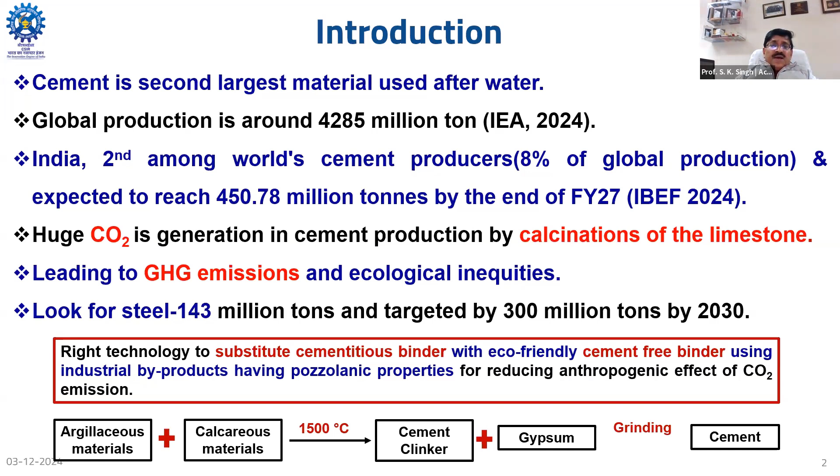Looking at the overall problems we are addressing: cement production consumes about 5 gigajoules of energy, a huge quantity of 1.5 tons of raw material per ton of cement production, and accounts for about 7% of global CO2 emissions. This varies by company. 1 kg of OPC releases about 0.75 to 0.85 kg of carbon dioxide. This is recent data, and day by day it is increasing.

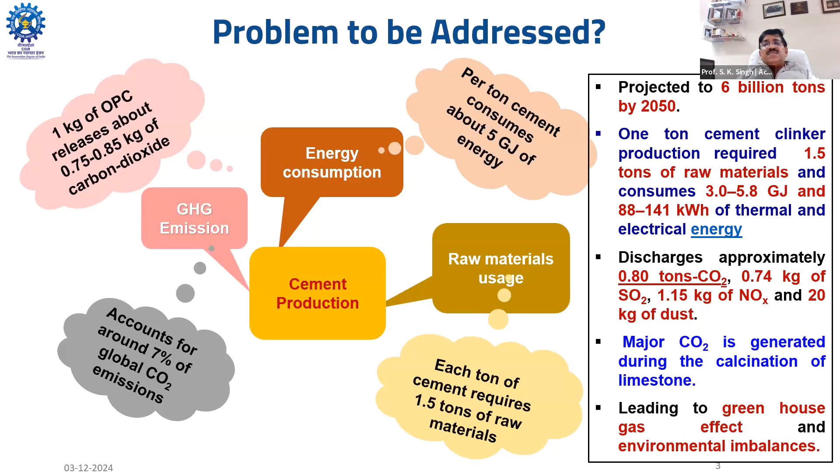Not only this, we are also discharging SOx and NOx in huge amounts. So we have to look into the next system.

So scientists and producers are working on how we can reduce the clinker factor. Industrial byproducts such as fly ash, ground granulated blast furnace slag, silica fume, calcined clay, or other materials are continuously being used, and every effort is being made to reduce the clinker factor to less than 50%.

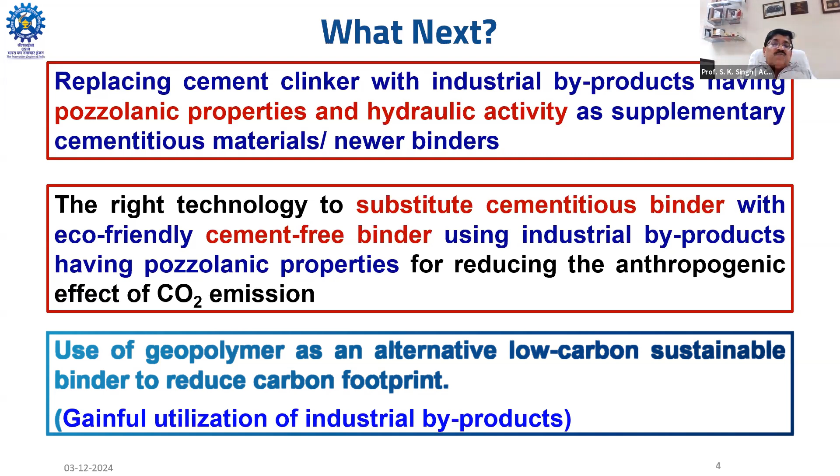We are also continuously working on other types of binders, known as alkali activated binders, which contain no cement, only utilizing some chemicals and industrial waste. This is known as geopolymer, a very low carbon sustainable binder that reduces carbon footprint. Not only is it sustainable, it also utilizes the huge quantities of industrial byproducts we have been producing. I have tried to list the different types of binders.

Different groups are working on this all over the country. It may be calcium aluminate cement, calcium sulfoaluminate cement, composite cement. We have a code also on composite cement, composite limestone cements, and alkali activated binders.

Recently my team has been working on this, and super sulfated cement, and also we are working on carbon negative cement and LC3. But if you look into it, every binder that's coming up has some issue or drawback or challenge. But if it's not allowed to be used in construction, then development cannot happen, no innovations can come up.

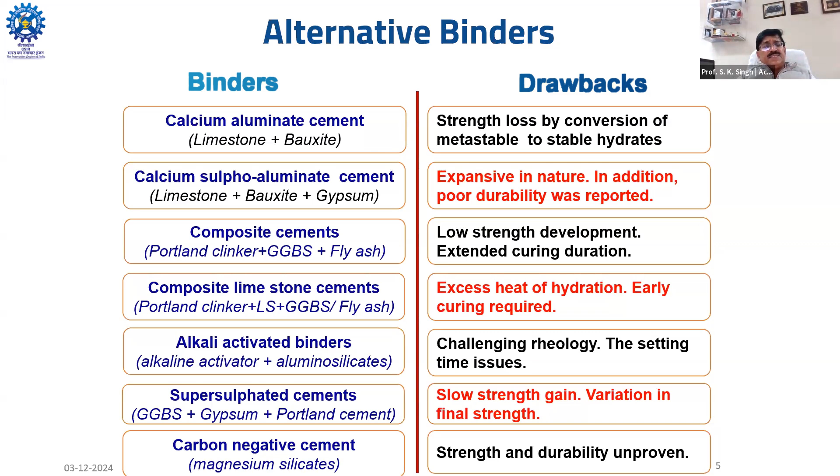So we have to definitely utilize those newer low carbon binders, looking into whether some minor effects are there which are not affecting our durability and strength properties much. If so, we will definitely go ahead.

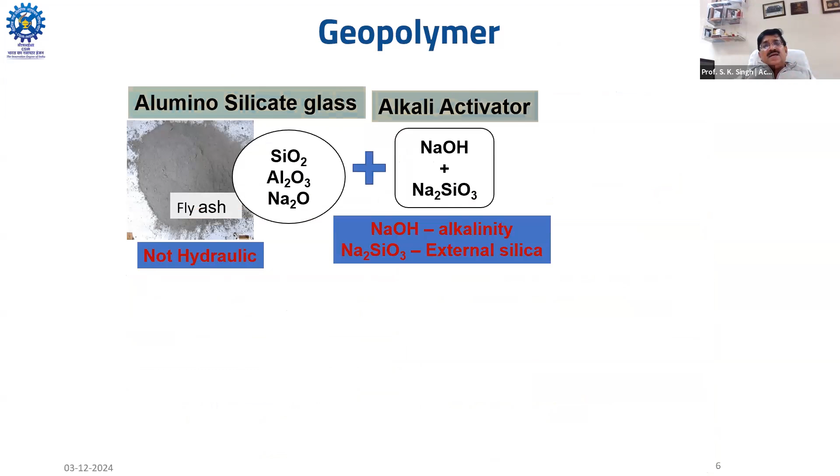For those who don't quickly understand geopolymeric reactions: let's take fly ash, which is rich in silica content, alumina and sodium oxide, which by nature is not hydraulic. We are adding alkali activators such as sodium hydroxide and sodium silicate, which enriches sodium as well as silica oxide through this activator.

So by applying some temperature, we are converting or producing NAS, that is sodium aluminum silicate. But because temperature is an issue, we want to develop these properties at ambient or normal temperature.

So we have to add some material which can quickly react with the aluminosilicate glass available in the precursor, like fly ash, GGBFS, or other things, which can generate exothermic reactions and generate heat, and later on we can convert into geopolymeric binders. By adding GGBFS into the fly ash and adding alkali activator, the available calcium oxide will quickly react with the available activators.

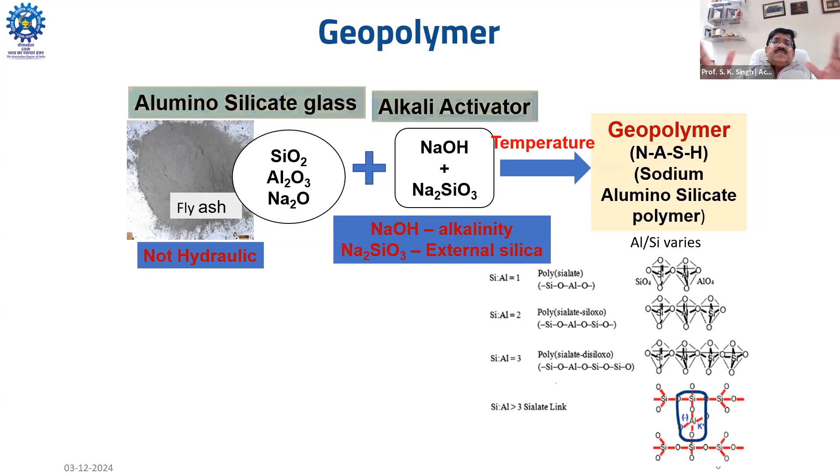And it will generate huge energy, and by this the internal temperature will increase, and the fly ash and other material will get activated and convert into NAS. So this is the basic chemistry about the geopolymer.

Then in Dadri, sponsored by NTPC, in other parts of the country. Not only that, we have made geopolymer self-compacting concrete and also building products like beams, slabs, and other things. We have also made a building with this geopolymer.

But one major issue is that there is sodium hydroxide involved. Handling of this corrosive material is a big challenge, and because of this we are not able to promote it in a bigger way in different parts of the world or country. We are making it, but scalability is a big issue.

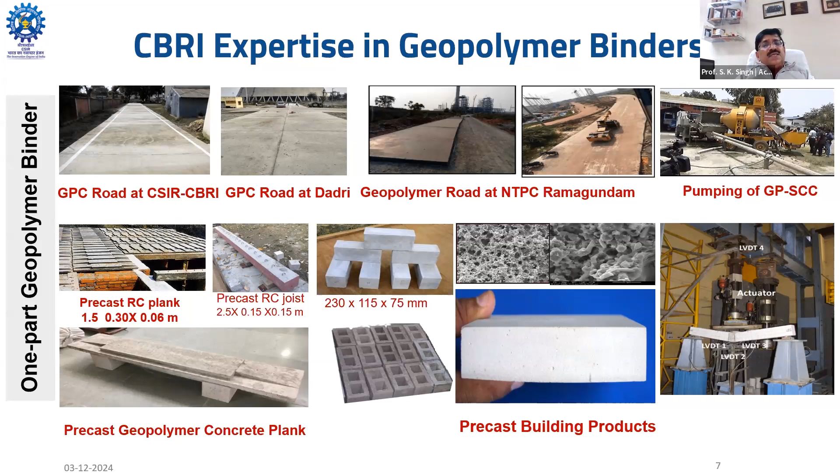So looking into that, we started working on single part alkali activated binders, which we can say are in dry form, and you just add water and develop it. We are looking at making it work similar to ordinary Portland cement or that type of cement.

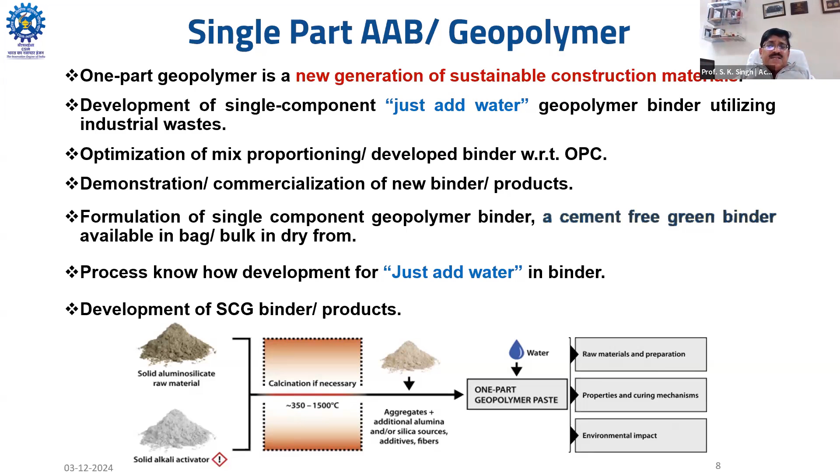We are working in that direction, and different precursor materials have been processed. Sometimes calcination is required, so we carry out the calcination and add those activators. We have tried sodium metasilicate pentahydrate and different types of activators, optimizing and developing this.

So what has been the driving force for this one-part alkali activated binder? If you look into it, we have huge quantities of raw materials like fly ash and slag. We have legacy fly ash in some parts, and slag is being utilized majorly by the cement industry, and we can use that to develop this.

Not only this, it is going to reduce the carbon footprint by utilizing it into the binders. Also, the government requires the use of different guidelines that have been promoted.

By this way we can go ahead and further support this type of binder, by adoptions like having a fine on legacy ash, and that fly ash should be utilized within 300 kilometers, as per some gazette notification, etc.

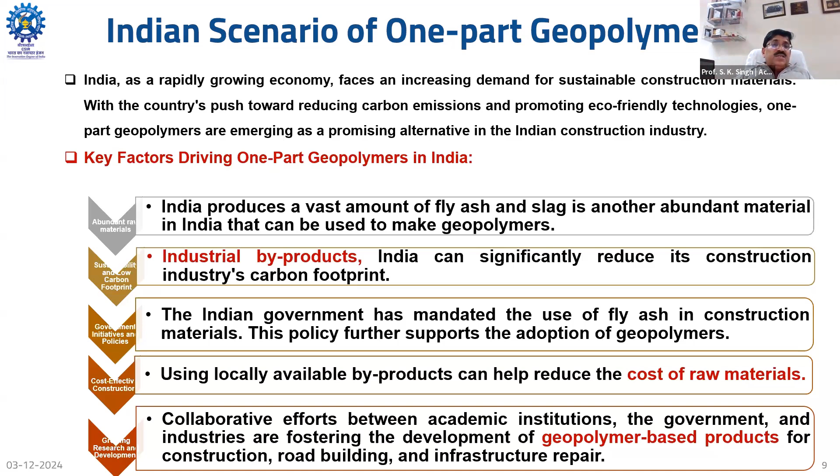Also, we have to utilize locally available products, so that we can have cost effective raw materials. And we have been continuously collaborating with different research organizations, so that overall we can develop this material.

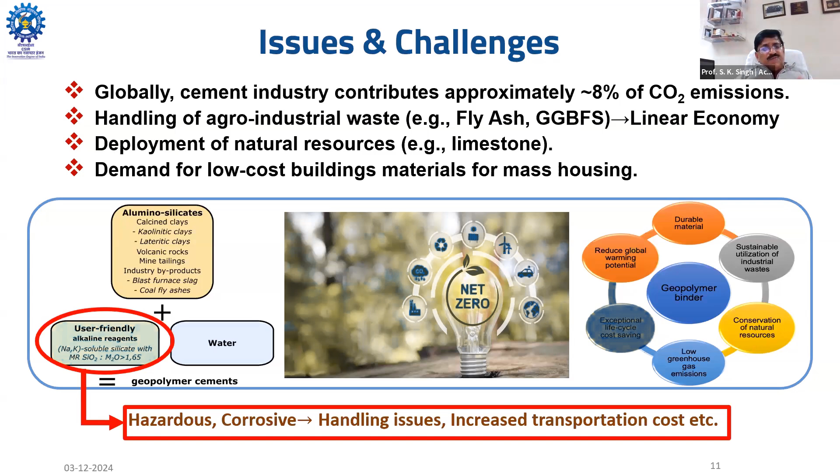So here this is only aluminosilicate based available precursor, and alkaline reagent - different types of reagents we can use and make it.

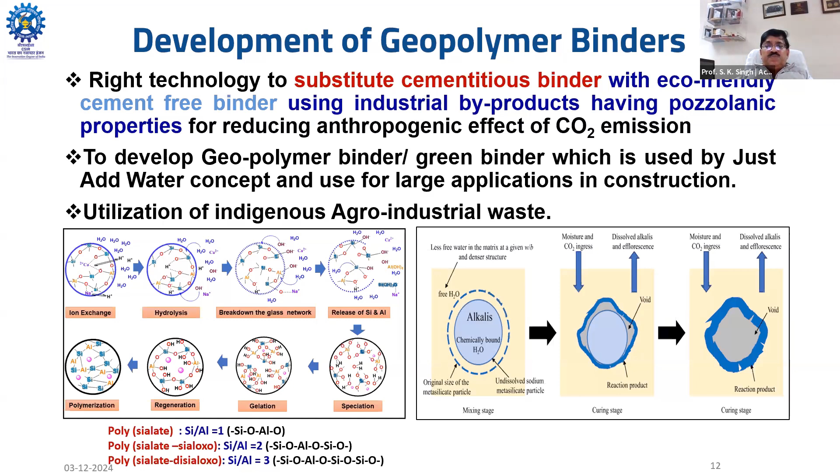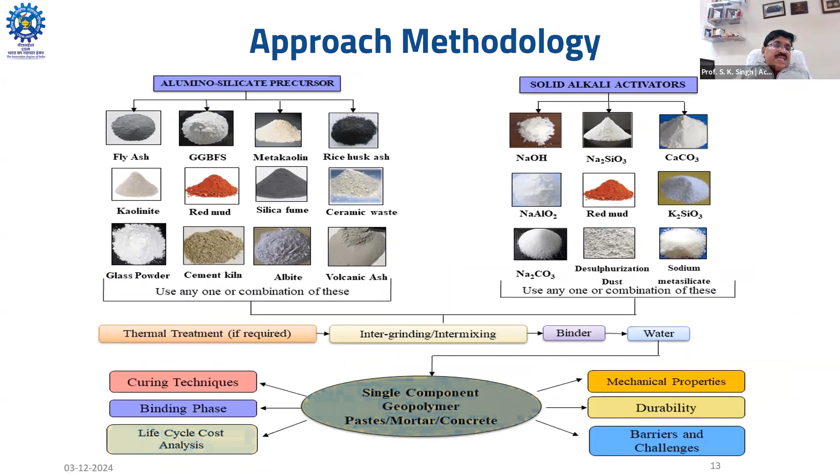And by this way, overall binder is being developed. So overall, I have tried to give you an overall approach and methodology of how we are developing this single component. Recently, we have done a transfer of technology adding some microfibers into this for repair of sewer lines and other things which have been corroded very extensively.

This development of alkali activated binder, ready to use - I'm writing geopolymer, but basically what we are developing is alkali activated binder. People are a little bit more aware about geopolymer, so we write that. We are using a huge amount of GGBFS which is rich in calcium oxide. We are activating these calcium oxides, and not only promoting a circular economy, but also conserving our natural resources, through polymerization by alkaline solid activators as well as aluminosilicate precursor materials.

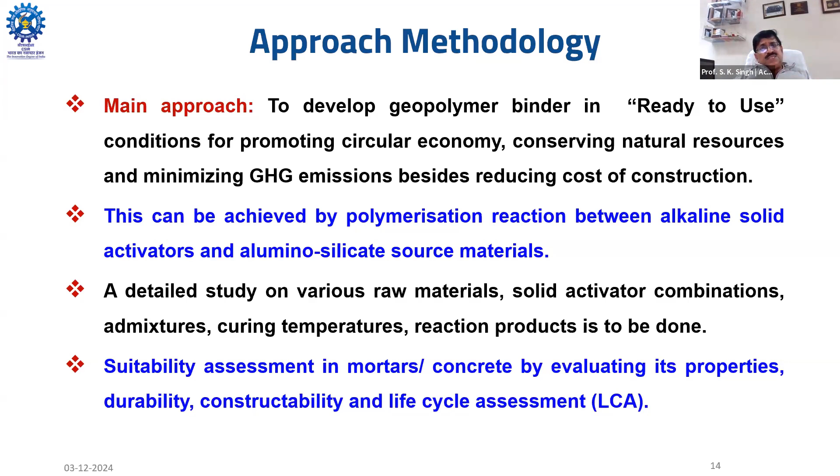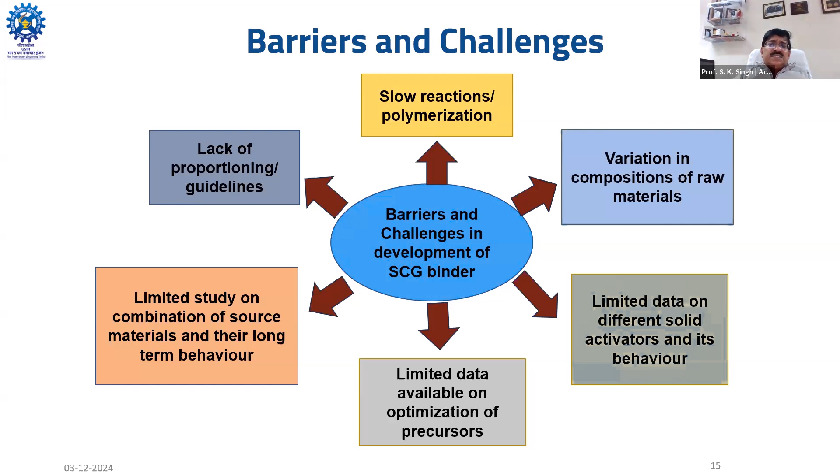Also, very limited data is available on different types of solid activators, because whatever solid activators we use, you should have better performance. Also, very few studies have been carried out on optimization and other behavior, and there's a lack of proportioning guidelines. Definitely there is no code for this single component, because this one is completely in a dry form, whereas in two-part systems it is in liquid form.

Mainly dissolution effects give exothermic reactions, and by this we have somewhat quick reactions in the two-part system, whereas somewhat slow reactions in the one-part system. In this case, reaction starts after adding water, whereas in two-part, the liquid alkaline solution is pre-mixed with the precursor and starts its reaction. With one-part, definitely we have a huge opportunity to be scalable.

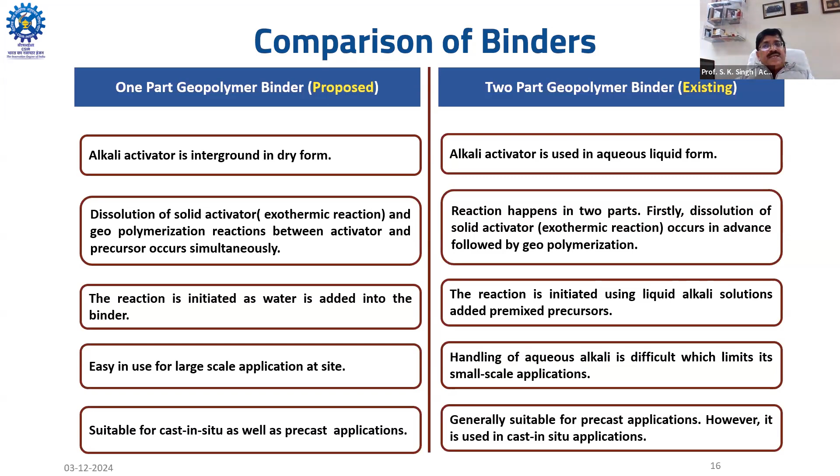We can go ahead with that, because we are used to using cement - ordinary Portland or PPC cement - for several years, just adding water and mixing. So this will give better prospects. Also, the overall cost will be lesser in one-part geopolymer binder as compared to two-part geopolymer.

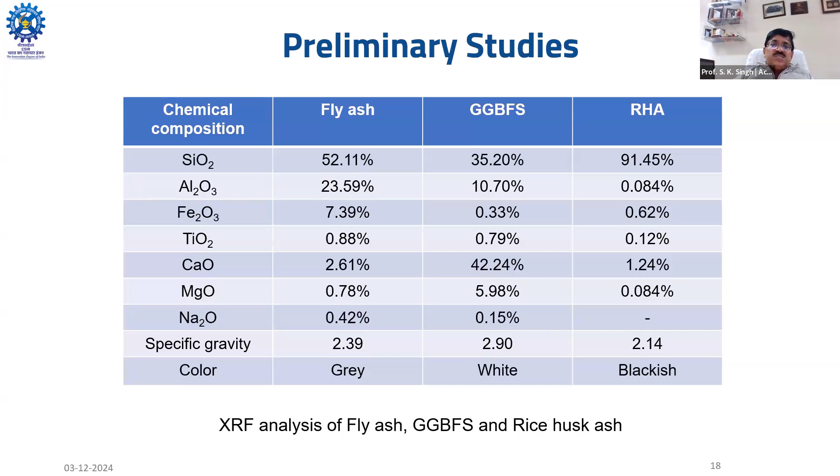Here we have carried out different fly ash and GGBFS optimizations. I'm not going into the details, but definitely if you are looking into the silica content - if fly ash has 52.11% silica - not necessarily will our silica particles participate in the reaction. So an amorphousness study is a must, through Rietveld or other methods, to establish how much reactivity is available.

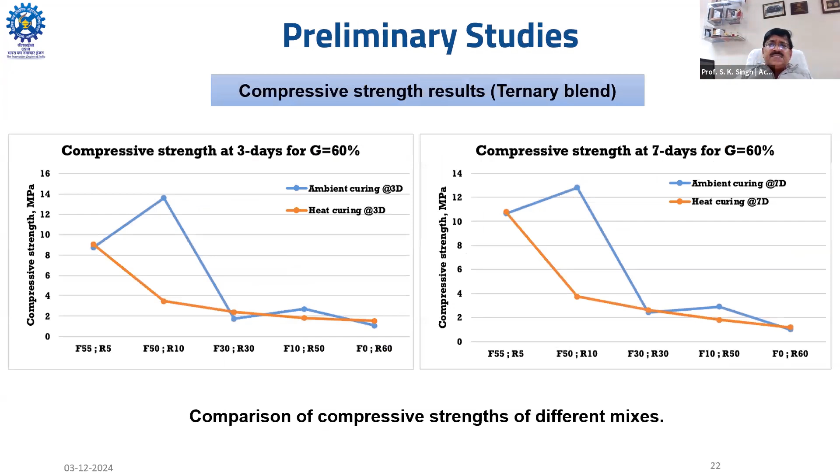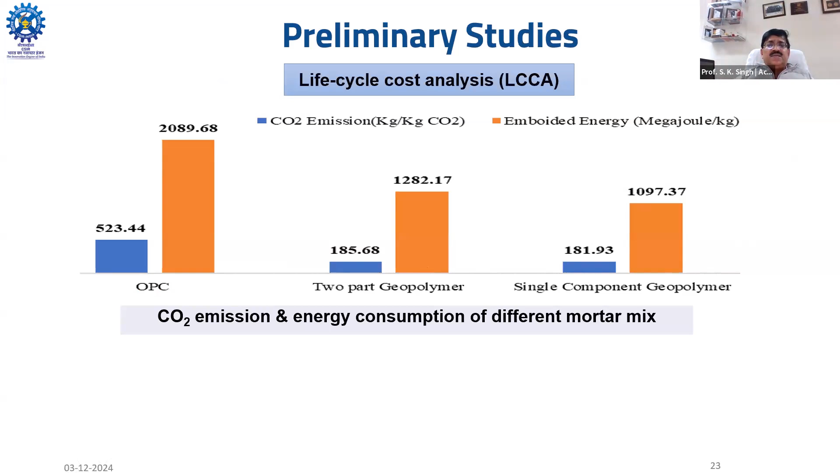These are some of the studies - this is the strength properties of our products, and we tried to give a life cycle cost analysis of OPC binder, two-part geopolymer binder, and single component geopolymer binder. By this way, we have tried different mortar mixes and given the studies here.

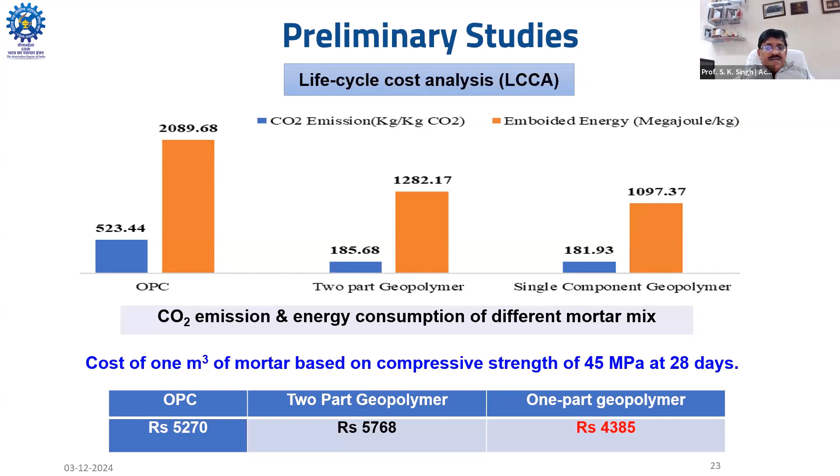This is only the cost of production, nothing to do with any profit or other costs. So if you are making M45 grade mortar per cubic meter, the cost with OPC will come to 5270, two-part geopolymer will come to 5768, whereas one-part will be about 4500 or so. So it has been cost effective.

Durability and other mechanical properties have also been studied. Among different activities, particularly on alternative binders, we have carried out very extensive research on activating steel slag, which is crystalline by nature - particularly LD slag and LF slag - in the laboratory. We have done a trial, successfully achieving 30% LD slag activation and developing binders from the same.

Also, we tried making clinker from other materials, because they have similar alumina, silica, and other components, so it can be utilized. We are promoting that through different alternative binders. Recently, we have worked on low grade limestone in the cementitious binder, because good quality limestone is also a big challenge.